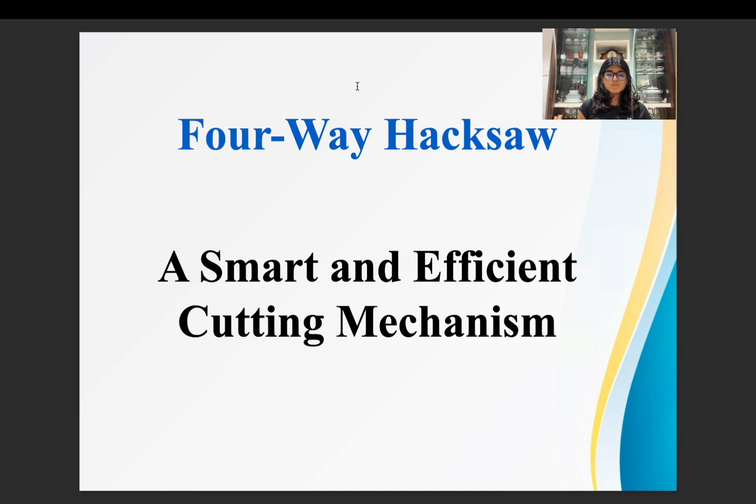Hello everyone. Today I'm going to explain a very interesting and innovative project titled Four-Way Hacksaw, a smart and efficient cutting mechanism. This project focuses on how we can make the process of cutting metal and similar materials faster, more efficient and less labor intensive using modern design concepts. In the following slides, I will take you through the problem, the proposed solution, its working components, design and advantages.

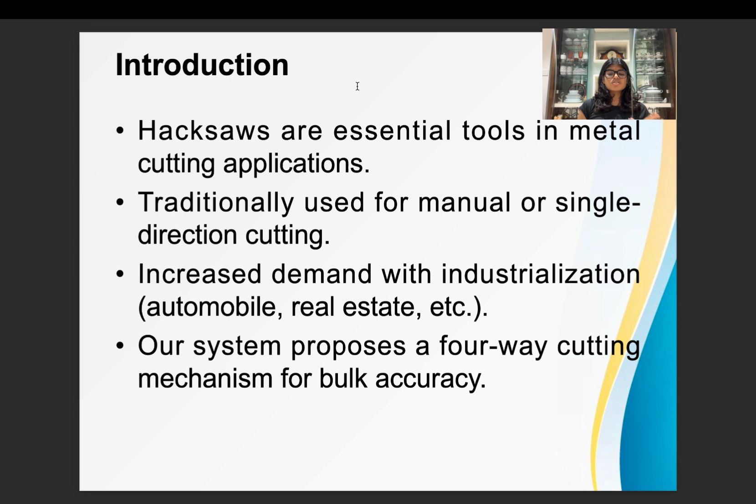Introduction. Let's begin with a basic introduction to the problem we are trying to solve. As we know, hacksaws are simple tools used in many workshops and industries for cutting metal and other hard materials. Traditionally, they work manually or in one direction, making them time consuming and labor intensive. With the growth of industrialization, especially in fields like automobile industries, construction, and fabrication, there is an increasing demand for faster and more efficient cutting mechanisms. So, the idea behind this project is to design a four-way hacksaw that can cut in multiple directions at once, improving productivity and reducing human effort.

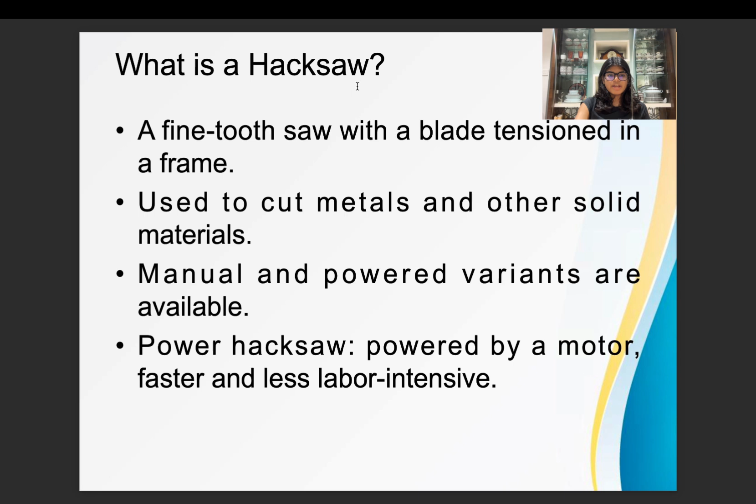What is a hacksaw? Before we go further, it is important to understand what a hacksaw is. A hacksaw is a hand operated or motor driven tool with a fine tooth blade fixed under tension in a frame. It is mainly used to cut metal rods, pipes, bars, and plates. While manual hacksaws require physical effort, powered hacksaws use a motor to drive the blade. The powered version significantly reduces human fatigue and increases speed, making it ideal for repetitive and bulk cutting tasks in industries.

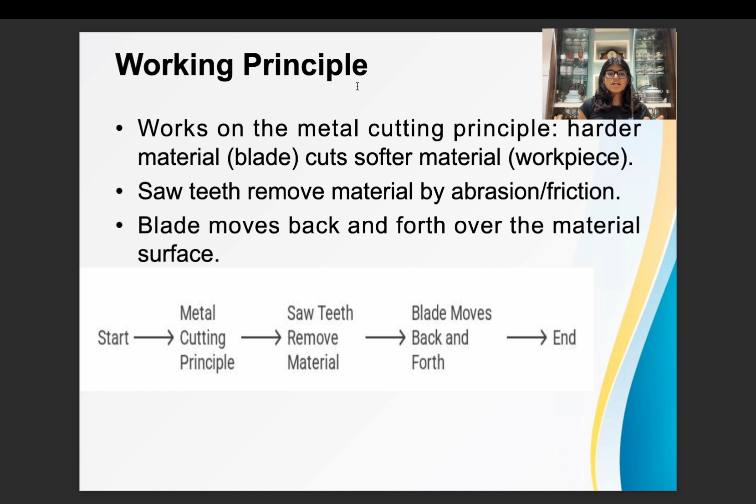Working principle. Now let's understand how the hacksaw actually performs the cutting task. The working principle is based on metal cutting theory, where the blade, which is made out of a harder material than the workpiece, cuts through by applying force. The cutting action takes place through a back and forth or reciprocating motion. As the blade moves, it scrapes or wears away the softer material through abrasion and friction. This process continues until the desired cut is achieved.

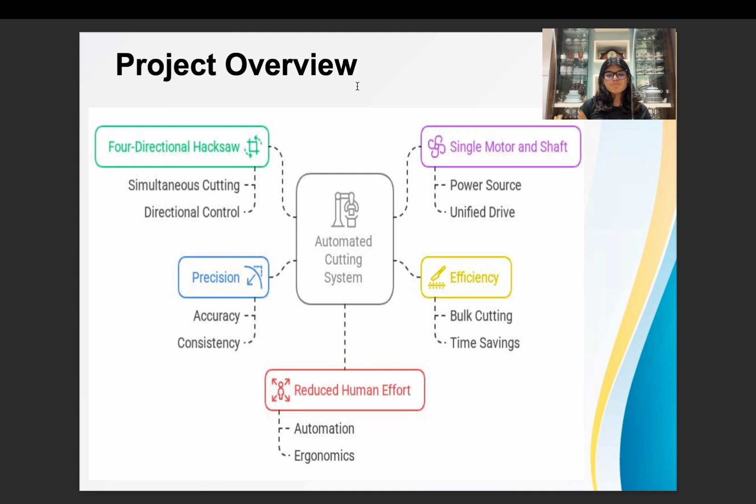Project overview. This slide gives us an overall idea of what the project aims to accomplish. Our innovation lies in converting a single direction cutting hacksaw into a four-way mechanism. Using just one motor and a well-designed shaft linkage system, we drive four saw blades simultaneously. These blades are positioned to cut in four different directions, allowing for bulk material cutting in a short time. It's a perfect example of optimizing productivity through smart mechanical design.

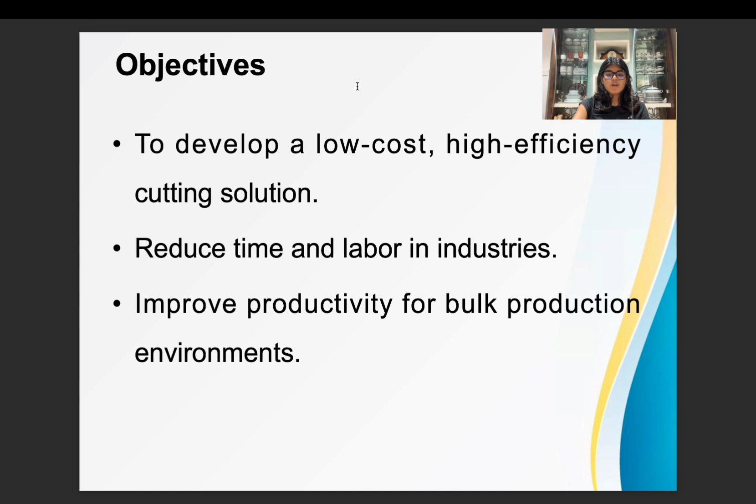Objective. Let's now talk about the main objectives of this project. First, we aim to reduce physical effort needed in cutting tasks. Second, we want to save time, especially in industries where multiple workpieces need to be cut. Third, we aim to reduce overall production costs by using a single motor to power multiple cutting blades. And finally, the entire machine is designed to be compact, cost effective, and suitable for small to medium scale industries.

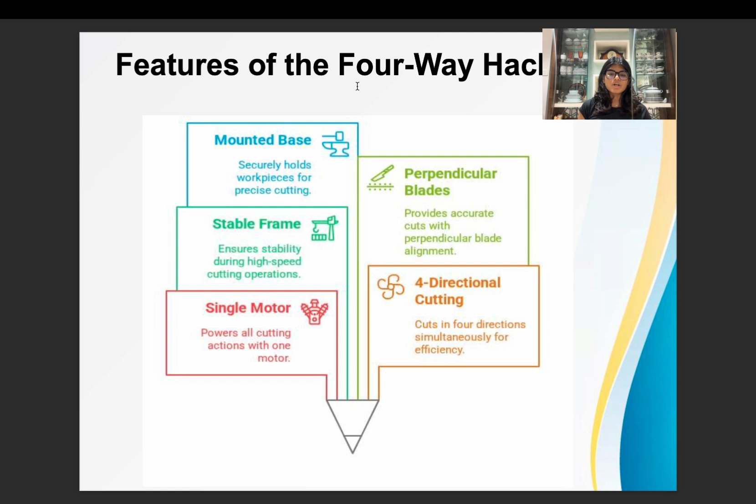Features of the four-way hacksaw. This slide highlights the key features of the proposed system. The machine uses a single DC motor to operate all four hacksaw blades. These blades are arranged perpendicularly to the workpiece, ensuring straight and accurate cuts. The metal frame adds stability and prevents vibration. This allows multiple materials to be cut at once with high efficiency. The system's compactness and smart design make it ideal for production environments.

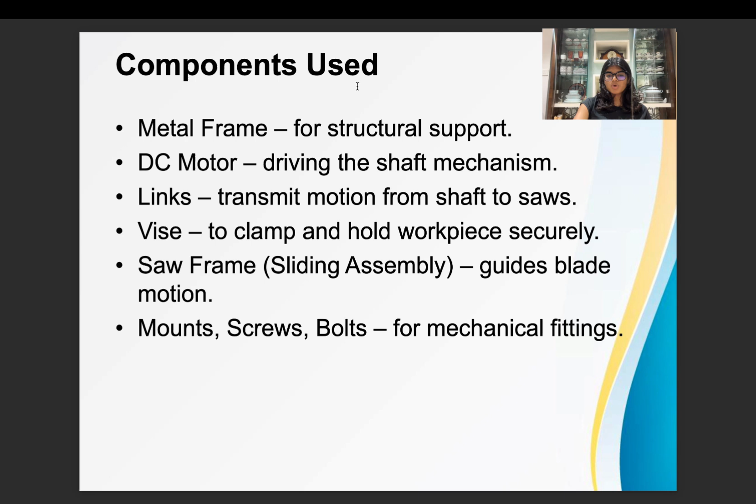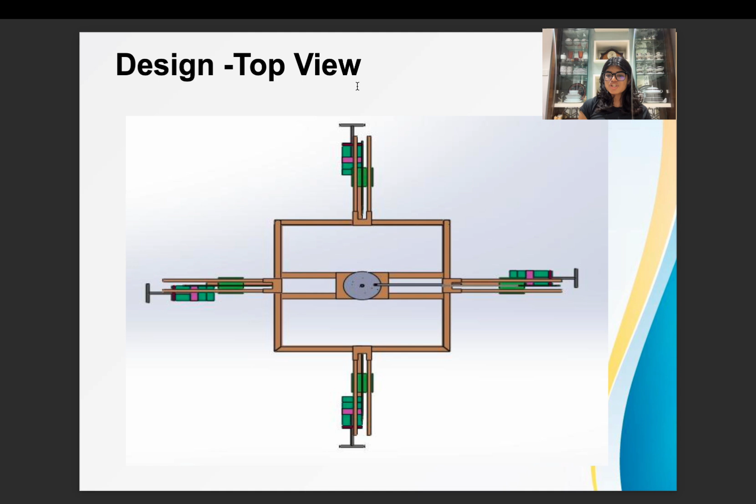Motor and shaft mechanism. Let's now understand the core mechanical working. The DC motor provides rotational motion. This motion is then passed to a shaft connected to the linkages. These linkages are specially designed to convert rotary motion into reciprocating motion. That reciprocating motion is transferred to each of the four saw frames, making the blades move back and forth simultaneously. This enables all four hacksaws to cut at the same time with synchronized motion.

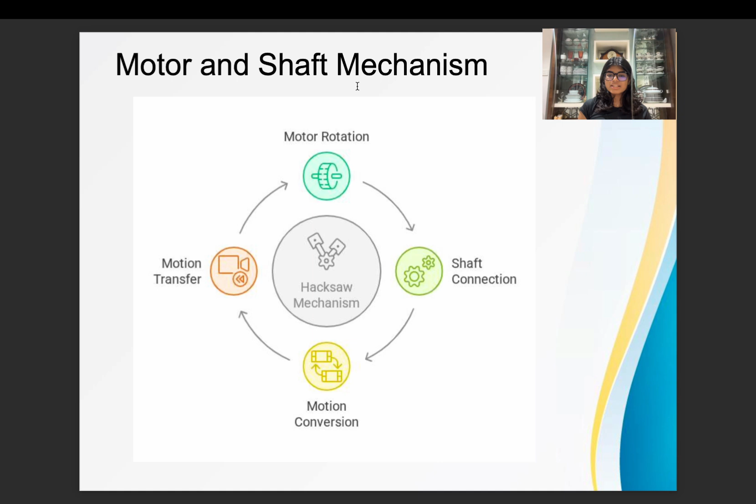Mounting and frame assembly. In this part, we focused on how all the parts are assembled. The hacksaw blades are mounted in opposite directions, like north and south or east and west. This way we cover four directions in a compact space. The metal frame holds all the components in place. Sliding guides are added to allow smooth and consistent motion of the blades. Stability and alignment are crucial to ensure clean cuts and avoid accidents.

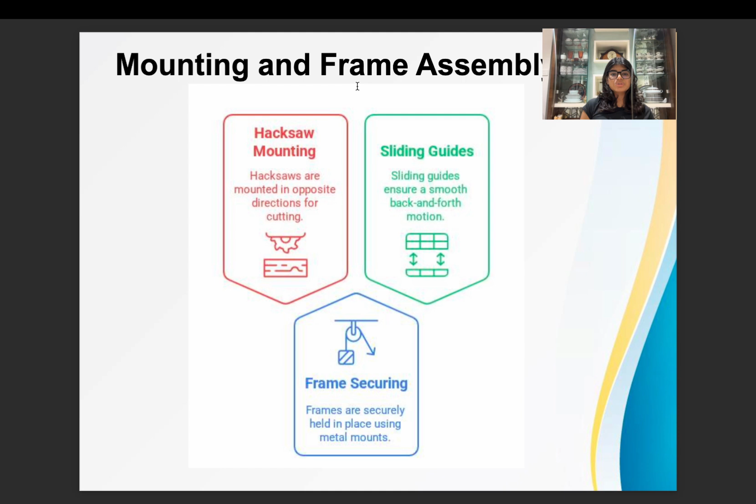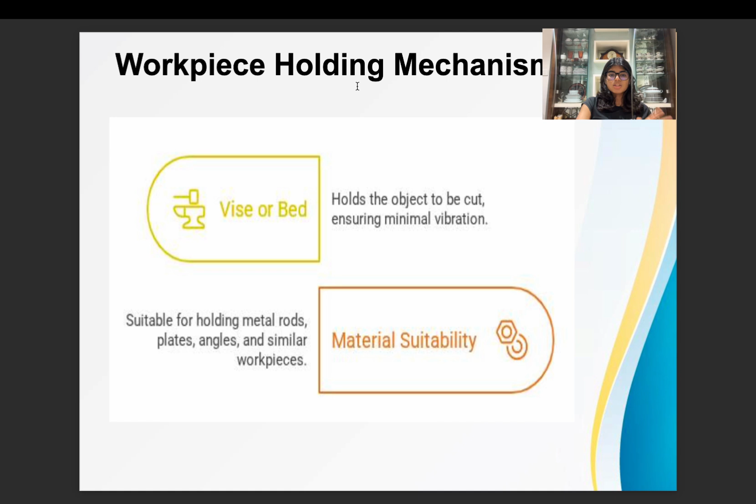Workpiece holding mechanism. How do we hold the object being cut? We use a vise or holding bed. The workpiece is clamped tightly using this fixture. This prevents the object from moving or vibrating during the cutting process, which could otherwise cause inaccuracies or damage. The vise ensures consistent pressure and alignment, helping the machine achieve uniform cuts.

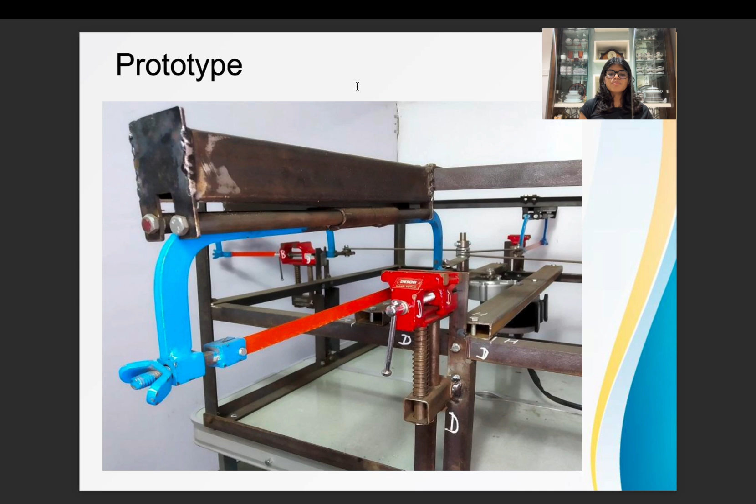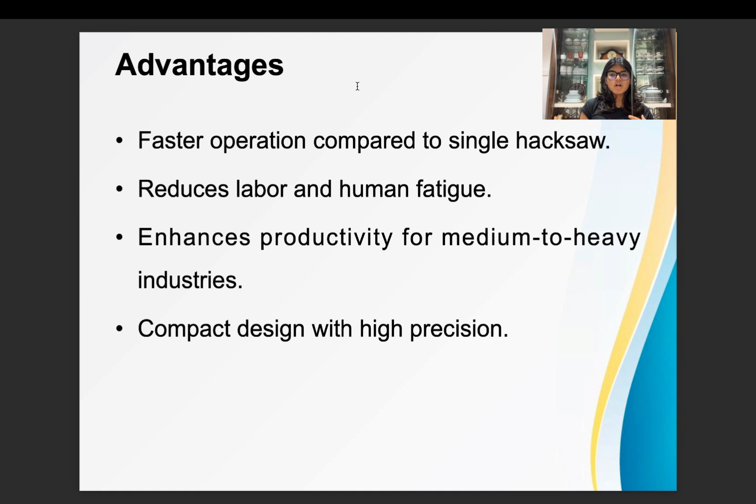Advantages. Here are the key advantages of the four-way hacksaw system: significantly faster cutting due to multiple blades working simultaneously, reduced manpower and labor cost, increased production rates, compact and easy to maintain, and improved accuracy and quality of cuts. Overall, this machine makes the industrial cutting process more efficient.

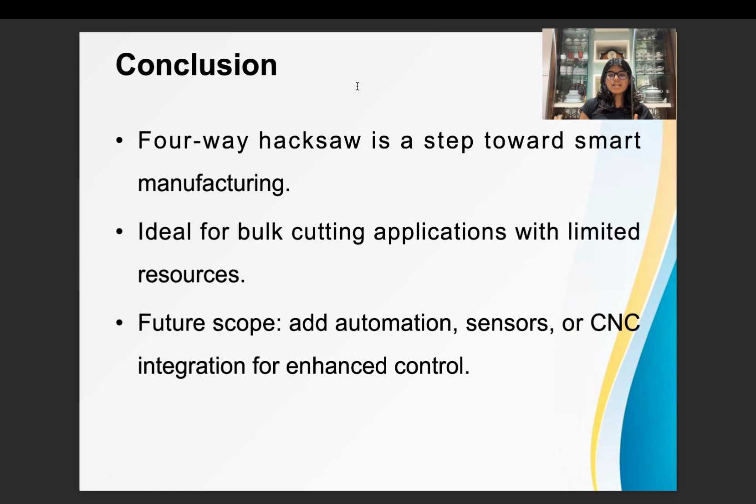Conclusion. To conclude, the four-way hacksaw machine is a smart and cost-effective innovation suitable for bulk cutting in industries. It simplifies metal cutting by using a single power source to operate four blades, reducing effort and time. In the future, we can improve it further by adding sensors for automation, using CNC programming for precision, and making it compatible with manufacturing technologies like Industry 4.0. I hope you have a clear view of this now. Thank you for watching.